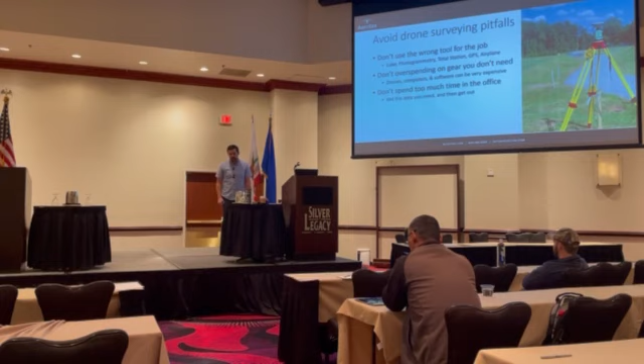But don't overspend on gear you don't need. That's going to be pretty darn important. Don't spend too much time in the office. I mentioned that earlier, that's another big pitfall where people spend huge amounts of time processing the data. What I say here is get the data you need and then get out. We're going to cover that a lot as well, of making sure before the whole project even starts, know what data you're trying to get out of it.

If you're just trying to get topo, then it makes no sense to try and classify power lines and get your photogrammetric model to model the tops of power poles correctly. That's a waste of time. You should focus on topo, get just topo, and get the heck out. Likewise, if you're just doing a 2D ALTA, who cares about topo? Don't worry about that later. Get your 2D planimetrics, and that's it. And then get out of there. That's going to save you a huge amount of time.

And lastly, don't treat this like a research project. A good drone program is boring, repeatable, and efficient. And that's one of the weirdest parts about this, that I come up here, admittedly, as a technology enthusiast, someone that has been working in drones for as long as drones have really been around on the consumer stage, someone that has been working, building, buying my own computers and things like that. And my goal is to make this as boring as possible.

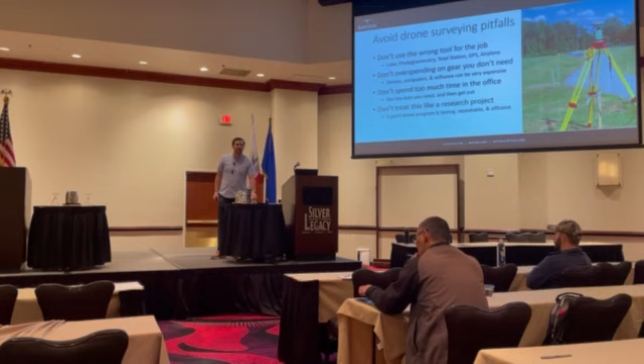I take this really cool technology that a lot of people, you can go to kids in school and say, hey, you want a career in flying robots with lasers strapped to them? Yeah, get the kids excited in a school program. And that's fun. But then I talk to surveyors and I'm like, no, you want the shine to wear off of this program so quickly. You want your drone to be dusty, dirty, and just work. And your field crews pick it up in the morning, go to a job site, put in a battery, push go, and it's just part of the job. It's just boring and uneventful.

And that to me is the real success of a drone program. It's when you can take all of this and just make it boring. It shouldn't require a lot of these crazy PhD level analyses. I've done a lot of those. They're hugely time consuming. And again, like those other programs, they just don't last. So to actually make it boring, what we found with most surveyors, with most companies in general, is there's kind of a journey that a lot of people go through as they learn drones.

And this is something that I really probably should update, as drones are becoming a lot more mature as a technology too, which is really, really cool that we've been figuring out what drones are good at. We've been figuring out what drones aren't good at. What are the good workflows? What are the challenging workflows? And people are now starting at kind of different points along that, because you can start and buy a $40,000 drone with some reasonable level of confidence that it can actually get you good data. Doesn't mean your workflow will get you good data out of that, but you can start with that.

The way that it used to work, though, is everyone would start with just buying a drone for basic photos and videos. Hey, it's a cheap one. I don't want to invest too much. Maybe spend a couple $100 or $1,000 or something on a photo drone or a video drone. Those are actually still great for photos and videos. Most drones in the world are actually designed for taking photos and TikTok videos and that sort of thing. Then they'll start throwing it in the software, whether it's Pix4D or DroneDeploy, something like that, start making orthophotos out of them and say, wow, that's cool.

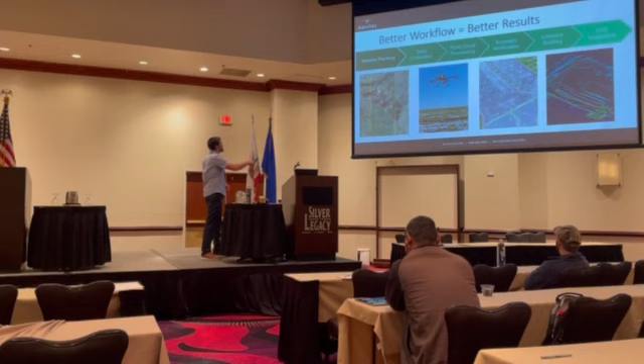And here's the high-level workflow that we're going to be going through today. This has really been refined and enhanced over the years. It's always been a fairly similar workflow for us, but we've added a few steps, taken away a few others, merged them because we've learned more and the technology has changed. But the beginning has always stayed the same for us. The beginning of any drone workflow, and this is the workflow once you've actually bought the drone. I'll cover the drone hardware in a little bit, and all of that setup for the program itself. But the actual workflow for gathering and processing the data always starts in the same place, which is mission planning.

Mission planning is super boring, really quick, but very easy to forget. Think of this as like your packing checklist, right? Whenever you go on a trip, you have a packing checklist and just make sure, okay, yep, I've got socks, underwear, pants, shirts, toiletry kit, whatever. It's pretty boring, but it's pretty important, because if you go on a trip and you don't have any of those things, you're going to be in trouble. Not the end of the world, but it's a real pain in the butt if you travel somewhere and don't have any socks.

Same thing with the drone. You should have your mission checklist. Just say, okay, make sure my batteries are in the case and charged. I plan my mission. I check the weather, and okay, we're good to go. That's all it is. It's a really boring thing, and we'll cover it a lot, but that's one of the biggest time savers when it comes to workflows: taking that 2 minutes the day before, or maybe even a couple days before, just to say, all right, where am I flying? Where are the targets going to be, and how are we going to do this?

Now, I say just a couple of minutes because mission planning is another one of those things that is really easy to overkill as well. People want to take a mission and say, all right, we need everything set up perfectly. Here's our 2-week process for planning the mission, for who's going to set the ground control. It's going to be set 2 weeks in advance. It's going to be marked with these permanent targets, and we're going to fly at this altitude on this day and this time. And honestly, it doesn't need to be that intense. That also can be a time killer.

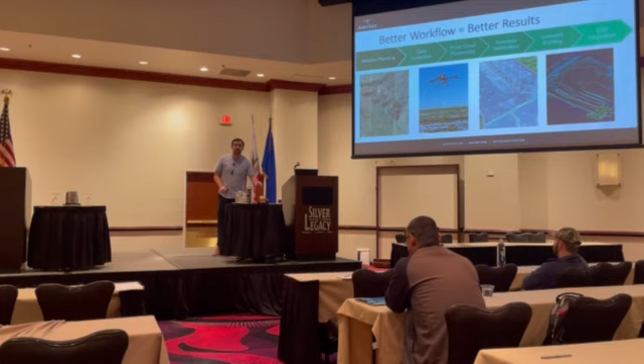And merging it with photogrammetry, creating all of these point clouds, creating those rich, high-resolution 3D models, is more than just photogrammetry processing nowadays. And then in here, after you create all of your point clouds, is accuracy verification. That's a really, really important step, and we think that location is a really important place in the workflow to actually do it. That's another what should be a very quick step that is often overlooked and will sink huge amounts of time if you don't do it until later.

We'll talk exactly what I mean about accuracy verification, but that's basically just saying, make sure that the point clouds that you created, the surface you created, lines up with all of your other data, right? That your topo shots are accurate, that your break lines and planimetrics, your 2D geolocation, is where it's all supposed to be.

Because if you start doing a whole bunch of drafting work and getting it all into CAD before you do your accuracy verification, sometimes we've seen people spend 8, 12, 16 hours on a project drafting it, getting all of this data extracted, only to find out later that it was inaccurate, that they had done some of the photogrammetry modeling wrong, or the LiDAR processing wrong, and they have to throw a lot of it out or find creative ways to shift it accordingly. So accuracy verification is kind of like mission planning. It's a really small, fast step when you do it right, but it's really important to save you a bunch of time down the line.

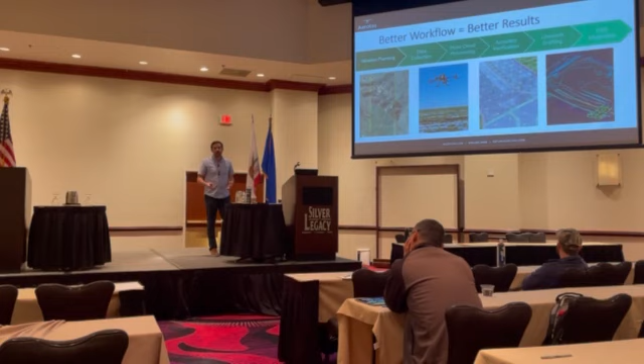Line work drafting is taking those rich 3D models and actually creating planimetrics, creating a more lightweight surface. It's often called vectorization, basically reducing those rich 3D models into something smaller, easier to use, that can be used in CAD. And then getting all of that data into CAD, creating your TIN surface, adding your break lines, adding your symbols, and making sure that all of your layers are correct.

That's the last step. Because when you put everything together, what you are looking for is just a survey. Or more specifically, what your clients are looking for is a survey. Very few people say, I would like a drone survey, at least from the client's perspective. What they often say is, I want a survey. What we hear from engineers a lot of times is that they want a drone survey because they want the live up-to-date imagery.

They don't actually care what technology was used to create the contours or the planimetrics or to take the shots, because they want to get a survey. And a final survey, whether it was done conventionally or with a drone, should look exactly the same, and the drone one might look a little better.

Yes, questions. Thank you.

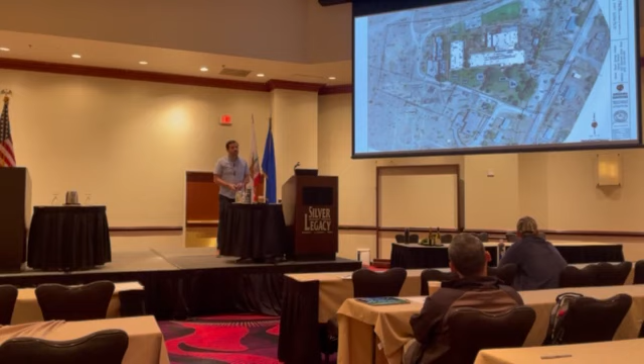Yeah, it's a great question. And yes, drone processing does alleviate that considerably. It's not perfect, and I'll tell you exactly why. So, first, the way that it alleviates it. Traditional aerial photogrammetry was done with very highly calibrated cameras, but typically with much lower overlap. The amount of overlap from one photo to the next was, by modern digital standards, very, very low. But they could get away with it because they were such highly calibrated cameras.

You match a point in two photos with a perfectly calibrated camera, you can be almost perfectly confident that that point is exactly where you want it to be. With drones, the cameras aren't that high quality, which is trade-offs. On the one hand, we wish we had quality cameras, but quality cameras and calibrating cameras is ridiculously expensive. So the way that digital photogrammetry makes up for that is with, by traditional standards, really high overlap.

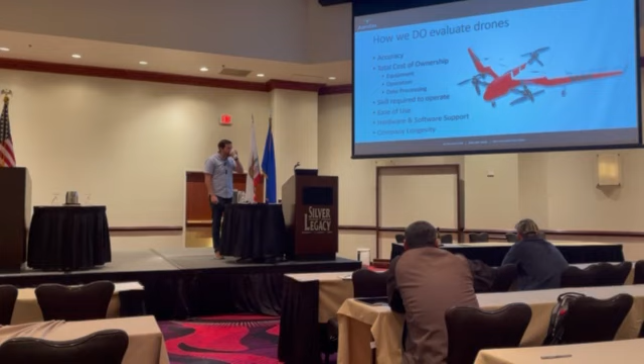So just a couple words of caution when buying drones. Always beware salespeople. There are honest salespeople out there. There are nice, good ones out there, but they're incentivized to often sell you a more expensive drone. I'm a little bit the opposite. You get to hear my perspective today, which is I'm incentivized for you to have a cheaper drone that works a little bit better.

Do not buy on tech specs alone. That's probably the most important. If I can urge you anything, please, please, please don't buy on tech specs alone. Tech specs are wonderful. Good tech specs often do lead to a good drone, but really it is the entire workflow that matters.

Lastly, just talking a little bit about some drones out there. Again, if you really want all of the detail on the different drones in the drone ecosystem, different companies that are out there, generally speaking, there are two categories: DJI, and everyone else. DJI is the most common manufacturer. We definitely see most drones that are flown for survey are still DJI.

Simple workflow, relatively cheap, easy to use, and very good, but typically, if we're being honest, not the best possible accuracy. With the downsides being that they're Chinese made, poor hardware support, and they're not going to be the most cutting edge technology. If you buy on the tech specs, like I've said before, DJI will lose out, so to speak, because other people will put more powerful LiDAR sensors, cameras with more megapixels on their drones.

And the everyone else categories are more specialized. They're often, not always, made or in some ways assembled in the USA, better hardware support and more cutting edge technology, but they really have a much more complex field workflow. They're much more expensive and they require specialized training. And I'd caution you to not underestimate how important these complex field workflows are.

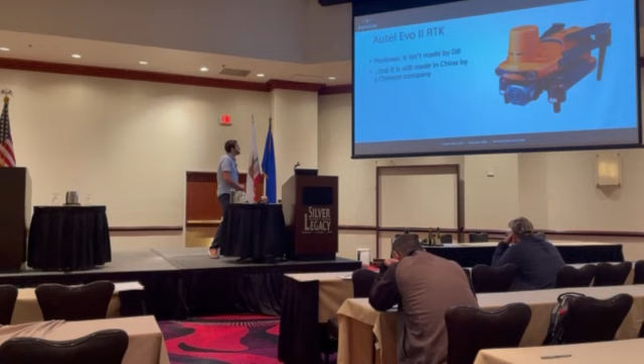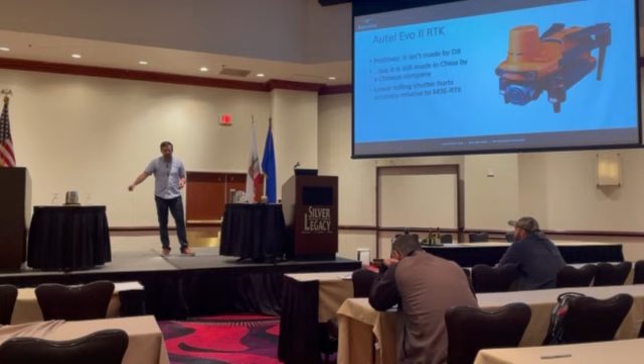I do want to talk about the Autel Evo 2 RTK specifically. That's a very common one because its main benefit is that it isn't made by DJI. That's the number one reason why people recommend the Autel Evo 2 RTK. Like I said, Autel is still a Chinese company. It's still made in Guangzhou or Shenzhen, I'm not entirely sure, one of those places. Still made in China by a Chinese company. And it has a linear rolling shutter and a smaller image sensor that hurts it relative to the Mavic 3 RTK. So if I had to say between the two drones, the Autel Evo 2 RTK and the Mavic 3 Enterprise, the Mavic is just a little bit better in pretty much every way.

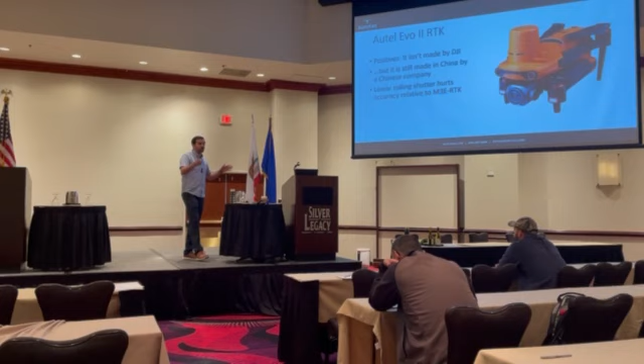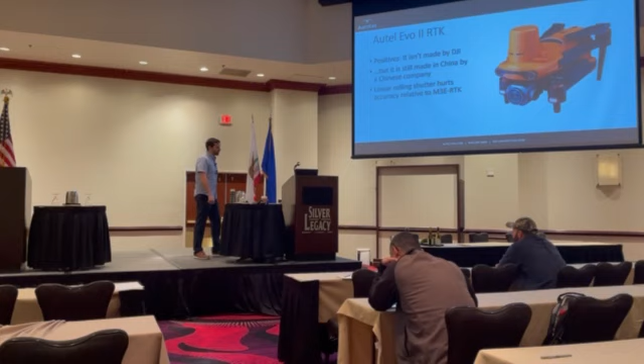The Autel Evo 2 is a perfectly capable survey grade drone. It's completely usable and it can get good data, but it's just not quite as good. It's not everything that everyone cracks it up to be. It's not made in America. It's not going to replace the Mavic 3. It's just not quite as easy to use in our opinion. It still works. If you use one of those, it's perfectly competent and absolutely can be used. But if you're deciding between them, we still think the DJI is going to be a much better value overall, a lot easier to use, and a little bit better data quality.

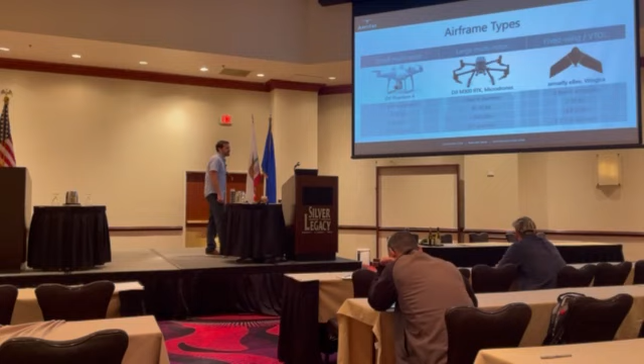Just kind of getting through all of this: airframe types. Small all-in-one multi-rotors like the Phantom, like the Mavic series. These are overwhelmingly the most common drones out there for surveying. And again, that goes back to the workflow side of things, because they're just straight up easy to use. They're easy to transport, which is a very underappreciated aspect of drones. It's not something that your field crews are going to look at and say, well, that's a pain in the ass, I don't want to load that in the truck.

The M300 and a lot of these bigger ones, field crews look at that and say, I don't want to use that thing, it's a pain in the butt. They will use it, but they're much more excited about things like Phantoms and Mavics because they're so much easier to fly, so much easier to set up and unload, so much less intrusive in the sky. Those are great. And then fixed wings and VTOLs, vertical takeoff and landing drones, have very much fallen out of favor lately, because they used to be common when drone battery life, drone longevity, wasn't as good.

Now that multi-rotors have really improved their aerodynamics a lot over the last 5 or 6 years, they've improved their battery, the manufacturing quality, how lightweight they are. People have realized that small multi-rotors are just as capable of multi-hundred-acre sites as fixed-wing drones are nowadays. Sure, a fixed-wing can fly a, call it a 1,000-acre site in like 2 flight batteries or something, and the small multi-rotor might take 5 or 6.

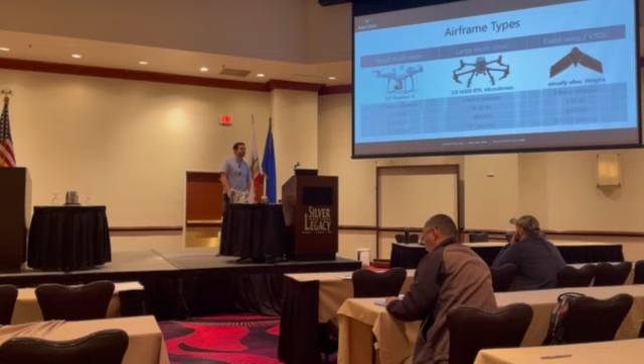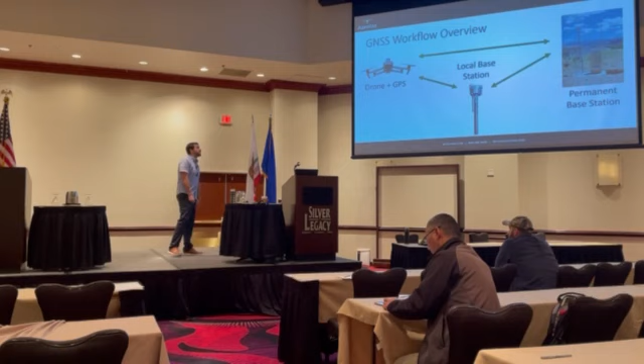Talking a little bit more about GPS workflow options as well. This was another talk that I gave, very in-depth about GNSS processing workflows, how you actually connect an RTK drone to a base station. Typically modern day drones, and in fact, by our recommendation, every survey drone that you buy today should be RTK enabled. There are older drones that are non-RTK enabled, like your old Phantom 4 V2 series or some of the Mavic series. If you have one of those and you're successful with it, great, keep using it. You don't necessarily need to upgrade. But if you're looking to buy a new survey drone, we think it absolutely ought to be RTK enabled. But the workflow does matter.

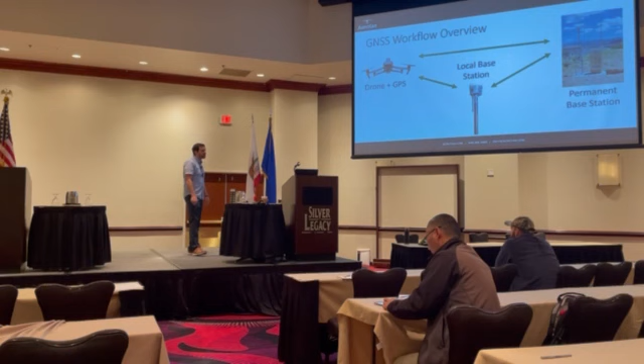How you connect the drone and its GPS signal to a local base station and then to a permanent base station for corrections and that sort of thing. With all of the different options for GPS workflows, there are more permutations than just on here. The simplest is no RTK, where all of your accuracy, all of your precision is coming from ground control points. Very simple field workflow, very easy to use. Other options are doing everything in post-processing kinematic on the drone. Pretty high accuracy. You don't need as many GCPs, but it's a pain in the butt.

Using RTK, real-time kinematic, with some sort of local base station, that's actually going to be our favorite workflow overall. That gets you very, very high precision. You still need GCPs in our recommendation, which I cover a little bit. And then the last one, RTK over NTRIP, which is the network protocol for streaming a lot of this GPS data. That works, but we don't love it. It's not going to be as accurate as actually having a local base station. The local base station really does make a difference in terms of overall accuracy.

Another thing on the hardware side is LiDAR and photogrammetry. I cover this in two places. One is when you're buying hardware, do you need LiDAR or photogrammetry? And the other is, assuming you have a LiDAR drone, should you actually use it on a job site? The questions you ask are going to be kind of the same: what does the job site look like, and how much vegetation is there that you need to cover? This is where we were talking a lot. Again, thank you for those questions about the pulses of what LiDAR can do. LiDAR's main benefit, the reason why you would buy LiDAR, is if you do a lot of work in vegetated areas where you need ground cover, right?

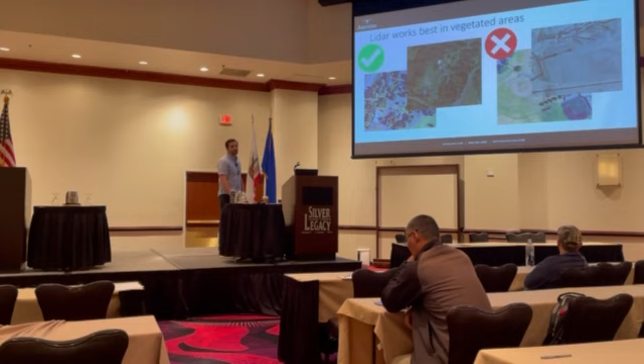Or of course, whether it's aggregates, earthworks, new construction subdivisions where there isn't a plant anywhere in sight, you definitely do not want LiDAR. At that point, it's just a pain in the butt and you're not getting any benefit from it whatsoever. The reasons to not use LiDAR, and again, this is what I was saying at the beginning about avoiding those pitfalls: the hardware is expensive. They are bulky and hard to fly. And I really need to find a way to stress better how much of a pain bulkiness actually is to real world field operations.

It's these little things that make the difference between a drone getting used a ton and a drone not getting used. The newest Mavic 3 Enterprise comes in a lunchbox size case. It's incredibly easy to throw in the truck and carry anywhere, whereas the M300 with any of these LiDAR systems, really any drone LiDAR system, is multiple huge cases that often require two people to load into a truck, a briefcase full of batteries that might weigh 50 or 60 pounds just for the batteries. All of your additional sensors are in their own case. Just the LiDAR sensor on an M300 is about the same size as the entire drone surveying setup for a Mavic 3 Enterprise.

That level of ease of use when it comes to these boring, repetitive workflows that I really like to see, I can't stress enough how important that is. And that's why we see so much more data from photogrammetry drones than from LiDAR drones, because honestly, a lot of the successful companies have learned you just bring the drone with you and you fly pretty much every site. Anytime you go, just fly it.

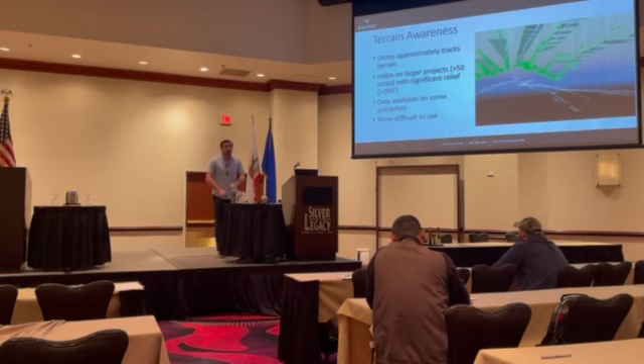A lot of things. Anything from rolling hills where you have 100-foot hills to cliffs where you're working on a coastal cliff where you might have a 100-foot cliff or a bluff of some form. Likewise, even if you have a project that's just a slow grade up the side of a mountain, or up the side of a road that's just going uphill and you're doing a mile-long road, and a mile that way is 200 feet higher than where you are right now, you should have a drone that slightly follows that terrain up and then slightly follows it down on the way back.

There are all kinds of different things, like quarries, right? Actually, quarries are a little bit trickier, I should point out, because the base terrain that you use for terrain awareness might be old, and quarries change their terrain by very significant amounts very frequently. So if you actually are doing any sort of terrain-aware flight on an active quarry, you've got to be extra careful about what the base surface model that's used in terrain awareness is.

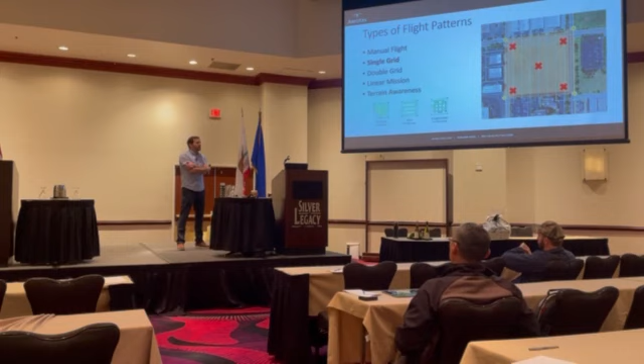This is a little interesting because there are multiple types of flight patterns out there, and we generally, for most applications, recommend a single grid flight pattern, or what is known as a Boustrophedonic flight pattern, also often known as lawnmower style, where it just goes up, down, back, forth, back, forth. There are some drone autopilot apps out there that call these 2D mission maps. In fact, one of the screenshots here says grid for 2D maps, which is really misleading. This sort of Boustrophedonic flight pattern is completely acceptable for 3 dimensions, and the data very much proves it out.

Because the alternative, what a lot of apps push, is a double grid flight pattern, where one grid goes north to south, the other rotated 90 degrees east to west. This captures about twice as much data, if you aren't changing any other overlap settings, which winds up making your processing time take about 4 times as long, because processing time is nonlinear. And for the overwhelming majority of missions, it provides no statistically measurable benefit.

Now, there are a couple of outliers there, like with LiDAR projects, where having different angles can actually improve some vegetation penetration. But for the overwhelming majority of photogrammetry missions, single grid is going to be half as much data, half as much time, and exactly the same level of accuracy. We've done lots of tests proving that out.

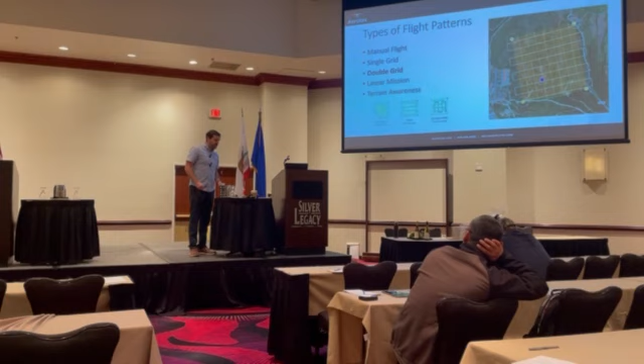That said, some people still insist on capturing double grid data. They think it's more accurate, it's more reliable. And if you want to take that extra time processing, then be my guest. But I'm just here to let people know that the data does not prove out that this actually gets better data for photogrammetric mapping.

A couple of caveats on that. If you are actually doing 3D modeling for, say, making a map of a video game, where you need the facades of buildings to be much crisper and have better resolution, then yes, a double grid flight pattern for photogrammetry will get you better imagery data on the facades of buildings where you have windows and doors and things like that.

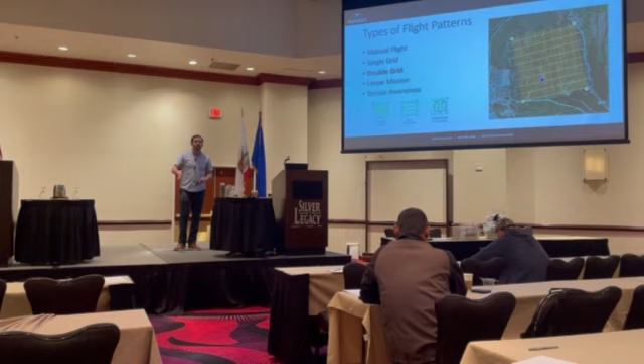For surveying applications, however, you usually don't care about how pretty the windows on the side of a building look in a 3D model. What you care about is the height of the building, the footprint, the topo, the paint striping, things like that. And for those circumstances, there is no benefit for the double grid, or very negligible benefit. So those are just the 2 most common flight patterns.

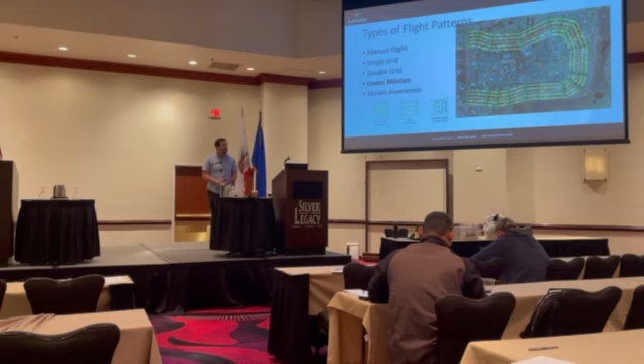There are also a few other ones, like linear missions. Linear mission planning is great, where the drone flies back and forth a few times over a road. A couple of things on the data side from there. Number 1 is we would recommend a minimum of 3 parallel flight lines, not 1 or 2. Yes, mathematically and based on the rules of physics you can get away with 1 or 2 flight lines. From a workflow reliability standpoint, we strongly recommend a minimum of 3 flight lines on any linear mission plan in order to get enough overlap to properly calibrate the camera and account for any other errors or a missed photo. Three flight lines is definitely what we would recommend there.

And then the last type is terrain awareness, which we already talked about, where you import a DSM. This is just an example of a kind of crazy linear mission plan that goes back and forth. And this is what the terrain surface based on that underlying elevation model would look like. Terrain awareness works great for both linear mission plans as well as for larger sites where you have more than 50 or 100 feet of elevation change over a project site.

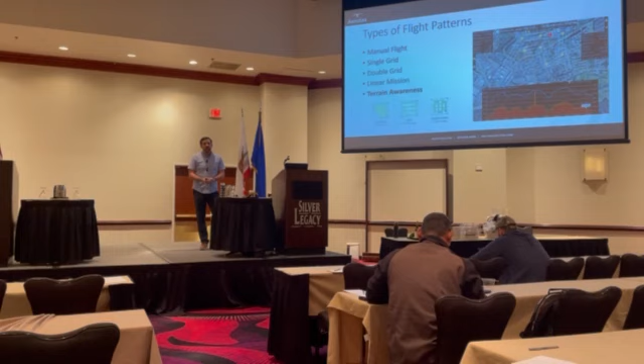But when it comes to mission planning and actually picking your altitude, the most important thing to note is that in the real world, there absolutely is such a thing as too much data. I don't love the type of people that say, oh, more data is always better because you can filter it out. Yes, you can filter out certain data. You can process with less data. You can use more computer processing time.

But that's a telltale sign to me that someone's looking at this from a research project standpoint. They're not trying to turn it into that boring, repeatable business workflow. To get that boring workflow, you don't want too much data. You want only the data that you need, because anything else just takes up time and money and processing costs and labor costs and all of that stuff.

And the recommendations to me to make this that boring, repeatable, profitable, useful workflow is, well, don't fly lower than you need. If you are doing 1-foot contours on undeveloped land, you really should be flying at 400 feet, basically all the time. If you are doing an as-built survey of a gas station or something, then yeah, totally fly at 100 feet or 150 feet, fly lower, get all of those details. You won't drown yourself in that level of detail on a site that's only a couple of acres. But if you are doing just straight topo, fly higher. That's actually a good thing.

Another thing that I haven't actually mentioned here is from flying too low, a lot of drones can often suffer from what I like to call the drinking straw effect, or trying to survey through a drinking straw. When you get so close to the ground with these drones, anything lower than 100 feet, the actual footprint that the drone can see on the ground is so small that it makes it much more challenging to do any sort of 3D mapping on it, because it's only seeing a tiny footprint of the actual ground.

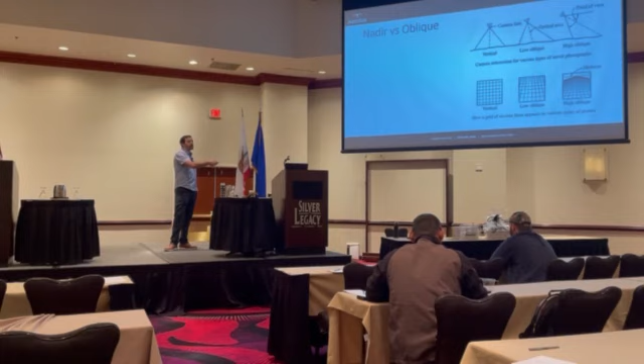So by tilting your camera up, by flying at obliques, people say, oh, I can see it from angles. That'll help me maybe see under trees a little bit better. That'll help me get my vertical accuracy a little bit better. The actual data and statistics doesn't really bear that out in most circumstances, at least not with the drones that do have over 80-degree field of view or something like that. What you actually are doing, you wind up getting less resolution. So more overall data with more photos and lower final resolution because it's further away from the drone.

This is going to be another one that's kind of close to that. You can see how big the squares are here, and just further away, they're just a little bit smaller. And that actually does, on a statistical measure from a whole project site, make an overall impact. So for us, we do generally recommend nadir imagery. We have not found any meaningful impact for surveyors from adding in oblique imagery. Again, there are going to be edge cases where that is not the case.

If you are doing the modeling on the facades of buildings, if you have a near completely sheer cliff wall and you need to get the face of the cliff wall, then yes, adding in oblique imagery can actually help with that. We are trying to get details on the vertical features themselves. Oblique imagery can help. But that is the exception, not the rule in survey. In survey, for most things, nadir is going to be better. And oblique imagery, like I said, is going to lower resolution, but it's going to increase your processing time. And the resulting accuracy is rarely improved by adding obliques.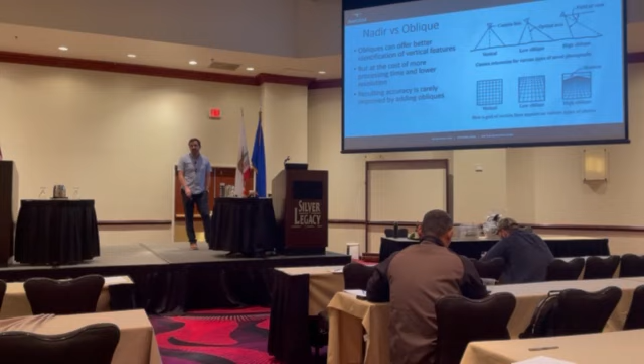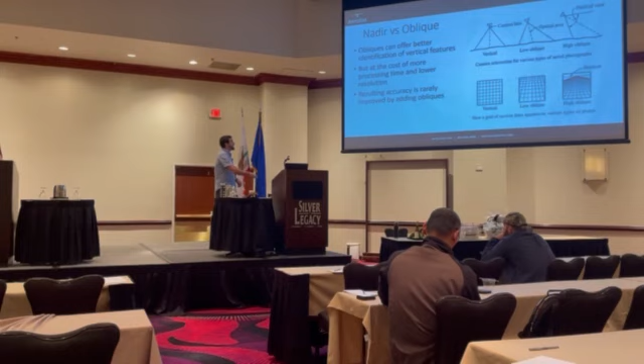This is, again, one where we've actually done a number of studies, a number of white papers: take the exact same site, fly it once with just single flight pattern, 75-75 overlap, and then fly it again with double grid pattern, and then again with oblique imagery and multiple things. And what you see is there is no statistically significant difference at all in the accuracy of flying these sorts of obliques or overlaps on the majority of missions. Statistically, it is completely insignificant. It does not change it.

So just kind of a summary of some of those mission planning best practices. Single lawnmower flight path is our recommendation for most projects. 75-75 overlap for photogrammetry, or 60-65% for LiDAR, and nadir only with no obliques.

Last thing I'm going to talk about is planning ground control points. And the first thing to talk about when planning ground control points, where to set them and how many to set, the real factor that makes a huge difference in mission planning is what type of RTK or PPK GNSS correction system you are using. Whether you're using a local base station, which we talked about earlier, that is very much our recommended solution, whether you're using a network correction service, or no ground control points at all.

Generally speaking, if you use no RTK or PPK, rule of thumb, you need 5 control points for every flight battery you use. They need to be pretty well evenly distributed, set around the corners, around the center of the site, something like that.

Whereas if you have RTK or PPK, really any of these ones at all, you need a lot fewer ground control points, and they are much less sensitive to their position. For example, with a site, if you can only access one side of the site because that's where the road is and the rest is very steep and off the cliffs, it's nice to have them on higher points and lower points to help with calibration, but it's not strictly speaking necessary because a lot of the precision within that drone flight is going to be coming from the actual onboard RTK nowadays.

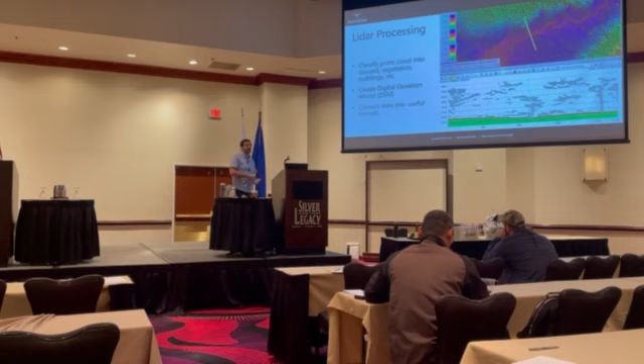LiDAR processing is also part of that point cloud processing step, that 3D modeling step. It's when you classify everything, or you create your LAS point cloud, you geo-reference it, creating a digital elevation model out of it, and converting a point cloud into useful formats. We don't consider point clouds to be a final deliverable. Many people do. But our personal belief is that the point cloud is only an intermediate step to actually getting to a surface, and that typically a surface or a CAD file is what your actual final deliverable ought to be.

And then once you actually have those rich models, you go through line work drafting to reduce it into a CAD-friendly surface to actually get your proper layers, your points, your polylines, that sort of thing. And then you finish it in CAD where you merge in your field shots, you merge in things like boundary.

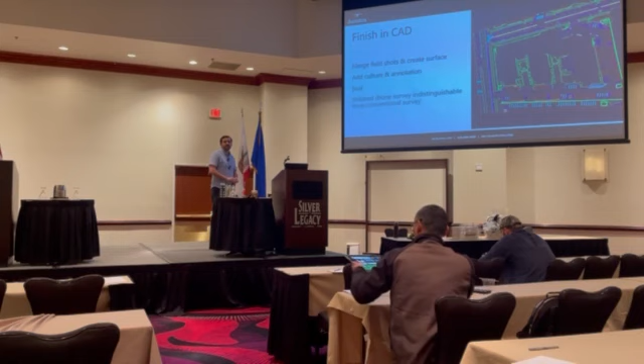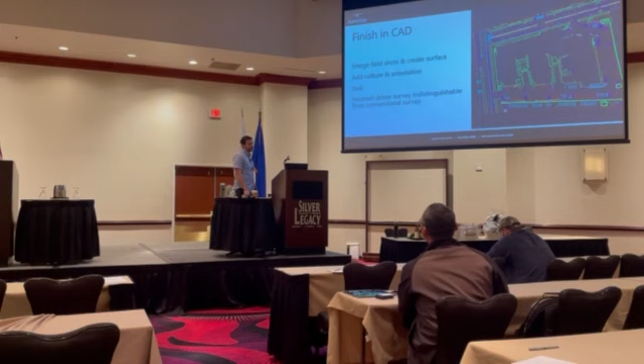You know, that's something that I never talk about much is boundary because, quite frankly, drones don't do boundary. You can't do boundary. That is both legally very protected, but also something where drones can't see legal lines at all. But finishing it in CAD matters because oftentimes you are doing a lot of the topo from the air, and then you do the boundary on the ground. You have to merge it all together. That all goes together.

So just to kind of summarize what a lot of this looks like all together. You start with photos, ground control, RTK, PPK data. This is kind of the raw outputs from your data collection stage. It goes through this photogrammetry and LiDAR processing step, which will create a couple of different deliverables, usually a point cloud, a digital surface model, and an ortho photo. Then it goes through what we call the line work drafting stage. That's where you have your drafters actually vectorizing and extracting this data in 3D points, polylines, typically going to be in a DXF format.

Then it goes into the final CAD stage, CAD finishing, final quality assurance, which is where you merge everything together, create your surface, contours, site culture, usually in an AutoCAD style DWG format, depending on what software you use. And that's what gets you your final deliverable. This workflow is pretty important.

And the other thing that we've found is really important with this is actually making each step fairly discrete, that you don't get to go into line work drafting until you are done with photogrammetry processing. A lot of people run it through photogrammetry and start doing line work drafting, and then they'll find an error and they'll have to go back and do more photogrammetry. And that's a real quick way to just spend a whole lot of time. These steps, we like having them pretty discrete. Yeah.

Great question. I'll cover that in just a second. The answer is a lot of different ones. But using things like Global Mapper or Virtual Surveyor, we use QGIS for some of this stuff as well. Oh my gosh, I'm drawing a blank. Terrascan is going to be one of the ones that we use heavily for LiDAR as well. Mm-hmm.

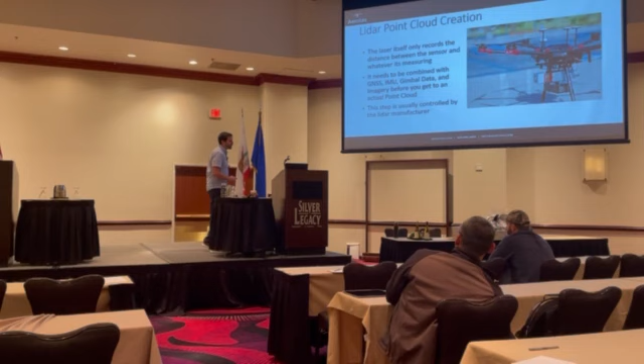If it's a 20-minute technical YouTube video for just how to create an LAS file, that's a big red flag for someone like me. Creating the LAS file should not be taking you 20 minutes of tutorials to know how. It should be much simpler than that. But yeah, in the background, all of these are doing the same thing. They are combining the GPS data, the base station data, the IMU data, the imagery data to actually create that single point cloud.

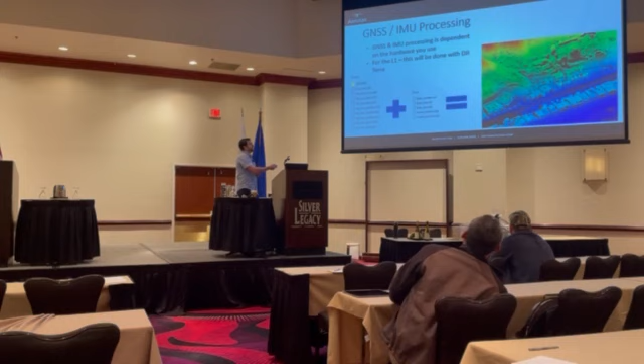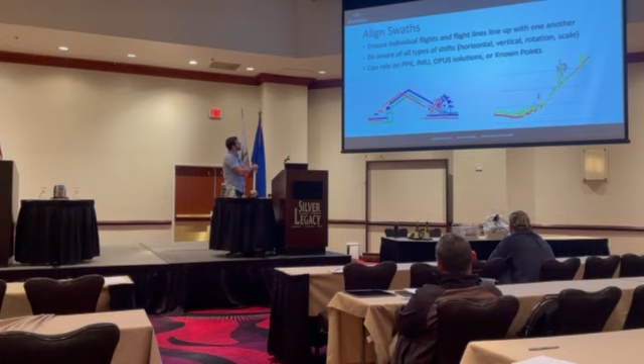Once you're there, depending on which LiDAR system you use and how you georeference it, you may also need to do a swath-to-swath alignment. This is based on a number of different factors, what type of GPS post-processing you do, because sometimes raw LiDAR clouds can look like this, where this is an exaggerated version, of course, but where a house on different flights might be slightly offset and you want to combine them together, that's pretty easy to do.

Now, there are a couple of ways to do that. You can colorize the point cloud based on intensity. That's one of the background ways that you can actually still see the ground targets. You can use a colorized LiDAR point cloud for 2D geolocation or for X and Y georeferencing. That is often not great because the colorization of a point cloud is applied typically after the fact. So the colorization on a point cloud is not nearly as accurate in 2D as most people want it to be. Or you can do a lot of this with GPS post-processing.

So there are a number of ways to do it, but either way, we really like using ground control points in general. And I mentioned this in the GPS workflow yesterday.

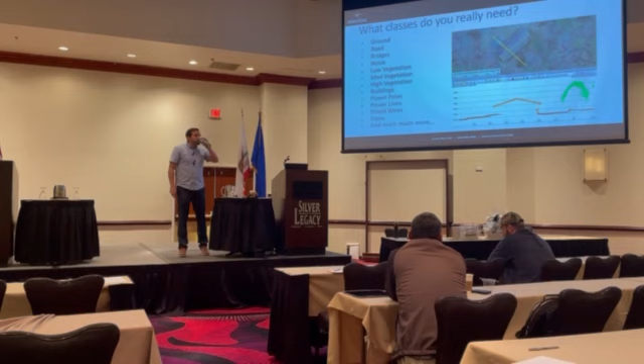Great question. LiDAR, 100% LiDAR. For power line mapping, LiDAR is really the only option. Photogrammetry is not capable of reliably collecting power line data. Exactly. Photogrammetry requires 3D matches, and power lines are 2D lines. So I don't want to say impossible, but it's effectively impossible to do photogrammetry to create power lines. You need LiDAR.

Actually, yeah, that's a good point. I really should add it to the slides. It's vegetation or power line. And power line mapping is its own kind of niche thing. For example, if you are doing that, your guys probably use PLS-CADD or some sort of similar power line survey program. And that's where you absolutely do need this sort of classification, because the rules are different as far as how far... I'm going to say something stupid because I don't know power lines that well.

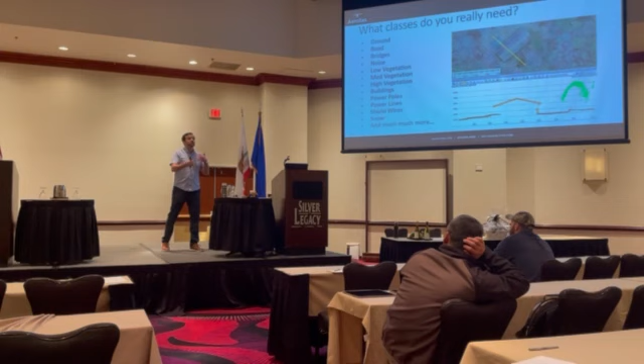A 240 volt line or something, how many feet that can be away from a building, how many feet that can be away from vegetation, and how many feet that can be away from another object or from a road very, very much matters. And that's where this level of classification matters. In fact, this was a survey that we did for a power line company that really, really mattered. And the distances from this line to that line really matter as well. So when you are doing that, it does have to be LiDAR, and you do really care about classifications.

So how do you actually classify it then? Well, what software do you use? With photogrammetry, Pix4D is the market leader. Point cloud classification, there is no real market leader on this. A lot of people say, what's the best software for point cloud classification? And what we've found is, we have licenses to most of these things. There is no magic bullet. Some are better than others. They all kind of have trade-offs.

Some have all of these different great tools, but they have a kind of clunky user interface. Some have a really smooth user interface, but maybe they don't have as many tools for doing path profile views and extracting lines and surfaces in different ways. Some are really good at their automatic ground classification algorithms, and others are better at their power line classification algorithms and that sort of thing.

But generally speaking, our recommendation is just to use what you're most comfortable with. If you are entirely in the Leica system and you already use Leica Cyclone, then yeah, it's going to be good enough. It's not perfect. I don't particularly like it, but we have some LiDAR techs that absolutely swear by it.

Global Mapper is kind of a GIS-based one. It really is a jack of all trades that can do a lot of things, but it's not going to be the fastest when it comes to very large point clouds. It can struggle with that sort of data. It's not the most advanced one out there, but it can handle all kinds of different data formats. These are some of the most popular ones out there, but really they're not all that great. Trimble Business Center is probably the weirdest one. That software tries to do absolutely everything, but some people swear by it.

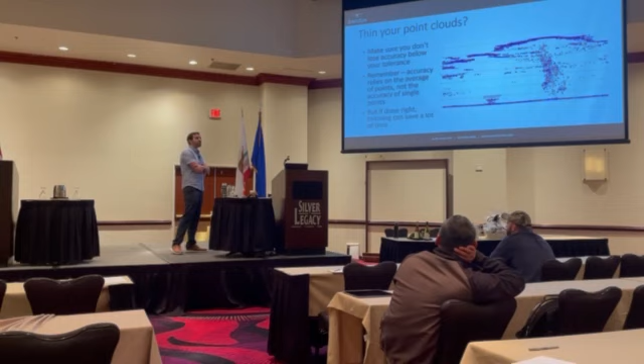It has higher highs and lower lows because of the way that the intelligent 3D thinning model actually introduced a bias into the data. So thinning point clouds to make the data easier to process is viable, but you have to be very, very careful that you are not introducing new statistical biases into your data.

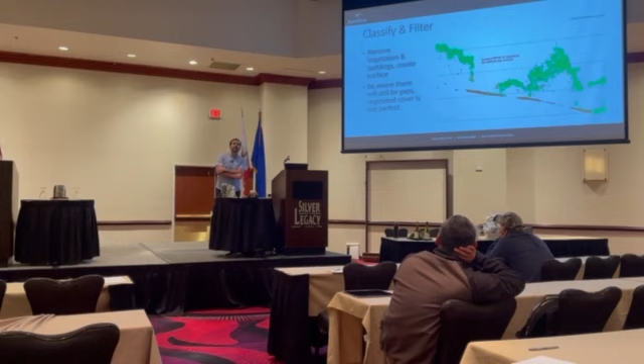From there, like we've talked about, you kind of classify and filter it, remove your vegetation. Also, another thing to be aware of is just acknowledging the fact that LiDAR penetration is not perfect, like we talked about before. There are gaps in here. Depending on what ground classification methodology you use, different softwares all have their own ways of setting how wide of a gap, how wide of a hole you can have without ground data.

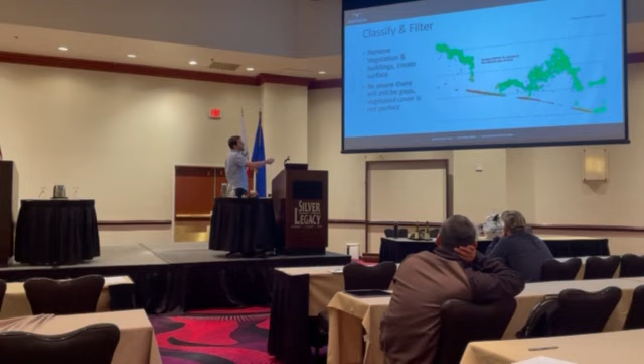Sometimes they'll see this gap and assume, oh, there's something there. So it calls the lowest points on this bush ground. And then your ground surface has a big spike here, which is something that's very common in ground classification algorithms.

So making sure that you have a human being to QA a lot of this is pretty important, because a human can often look at the imagery and say, oh, there's a big boulder there that actually probably would be a high point in the ground to show it as a rock. Or that's just a dense bush, and you then go interpolate directly underneath it. So just acknowledge imperfections in the data, because again, we work in the real world, and data is totally imperfect.

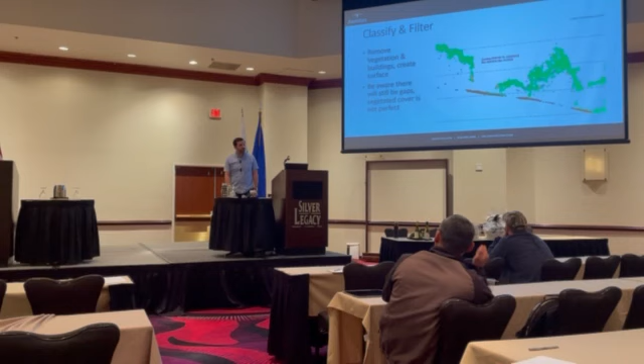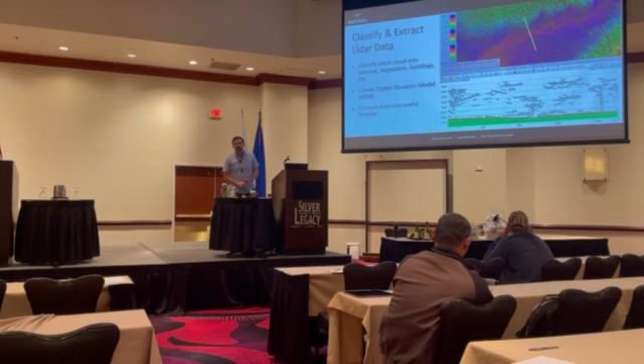So once you classify it, our next step typically in LiDAR is actually to create a digital elevation model as well. I'm pretty sure I have some slides in a bit of exactly how to do it and why we like converting LiDAR ground data at least back into a rasterized DEM. We'll cover that in just a second.

But one last thing on ground classification is, honestly, part of why automatic ground classification programs still have a ways to go is because there's so much human judgment that's required on what even counts as ground. For example, if you see a big debris pile like this, there is an argument to be made that, yeah, that's ground. It's a bunch of chopped up concrete.

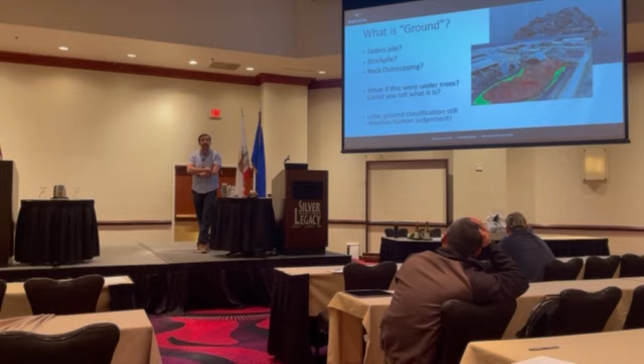That's basically a little concrete hill. Alternatively, there's a way to say, no, that's a stockpile or that's debris. We're going to be clearing it. The actual ground surface would go underneath it. Likewise, with major stockpiles like this, is the actual quote unquote ground surface going to be the top of this stockpile or the bottom of this stockpile? And the stockpile itself is classified and measured differently as a stockpile. There are very good arguments and good use cases for both of those things depending on the actual survey.

And same thing with rocks as well, right? Is that ground by itself, or are those rock outcroppings that are marked separately? There are reasonable arguments to be made for both. And the human judgment is, could you even tell what all of these are if it were underneath trees and you didn't have the images? A great one that I should put a picture of on here that is different between humans and automated things is if you ever see the profile of a car underneath a tree.

If you had a car parked underneath a tree, a human can look at the profile of that in pretty much any way in LiDAR data and say, that is obviously a car that is parked under this tree. I can see that there is a road going under this as well. So that is clearly not ground, and you just ignore it. Whereas an automated machine would say, oh, that looks like a hill to me. It's a lump, it goes up, it's not at crazy steep angles necessarily. It's just a 3 or 4 or 5 foot tall hill, and that's what an automatic ground classification will do.

So we like a lot of these automated ground classification softwares. They are great, but they pretty much all require a certain level of human judgment to clean it up and get that final information as well. From there, like I said, we actually rasterize the point cloud data too after we classify it before we finally get into the final surface. And part of the reason we do this is aerial LiDAR point clouds are, as I said, clouds. They are not perfect individual points.

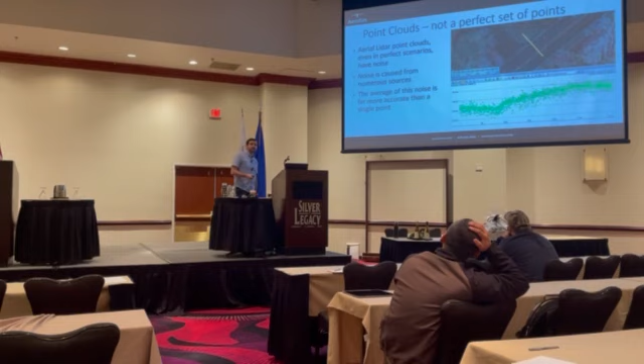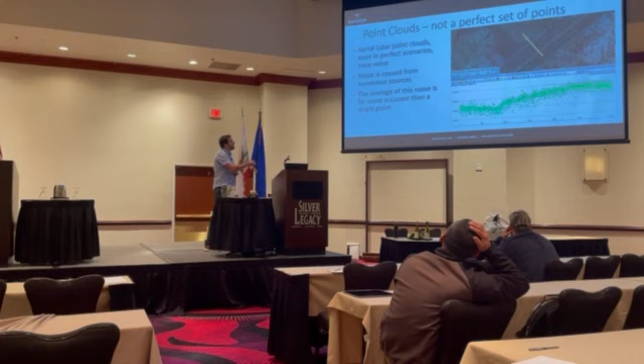This is one of the coolest parts of the workflow to me as the mathematical statistical guy that I am. This is what a profile view of a point cloud looks like. And if you look here, this is the top-down view. You can see this is a profile view of a road. So it starts here, kind of goes down, and then it goes up towards the crown of the road, just so you can see in the profile view. Now that's concrete, or it's asphalt. There's no vegetation. That should be a pretty hard surface.

But what we actually see here is a cloud. There's actually a good amount of noise in that data. This is the reason why a lot of people say, oh, I don't like the L1, or maybe I want these other systems because there's noise in the data. And while each individual point on this point cloud may have half a foot of noise or accuracy on each individual point, the average of these points is statistically proven to be far, far, far more accurate than any point individually.

The human eye again is really able to see this. You'd be able to draw a line that goes down the kind of weighted average of this, and it would be smooth. And the data very much bears the fact that that line, that average of all of these points, is going to be a lot more accurate than trying to take individual points out of the point cloud. And this is where your LiDAR processing workflow really matters. Because if you just extract individual LiDAR points from your LiDAR point cloud in order to create a surface, then you are getting this much error. You might see half a foot of error. But if you are rasterizing your data, you're averaging those points, you're going to get a lot better data.

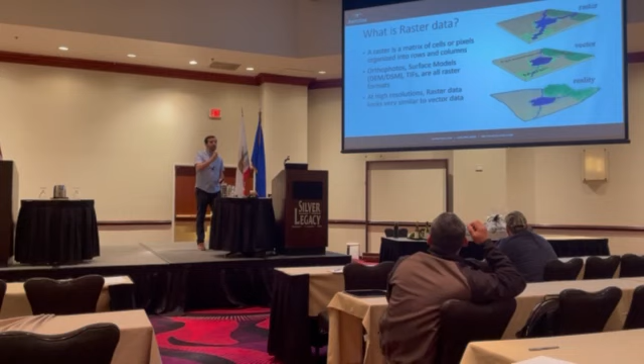So what is raster data? That's basically taking the point cloud, the vector data, and turning it into raster data. Raster data is going to be a grid. A picture, for example, is a raster data set because it is all pixels. It's the number of pixels in the grid, and it is rasterized. A little bit more simplified, this is the difference between vector data, which is going to be exact lines, and this is what it looks like in raster data. Obviously, we're working at much higher resolution, so we're not actually gridding everything to the point where you're losing any meaningful details.

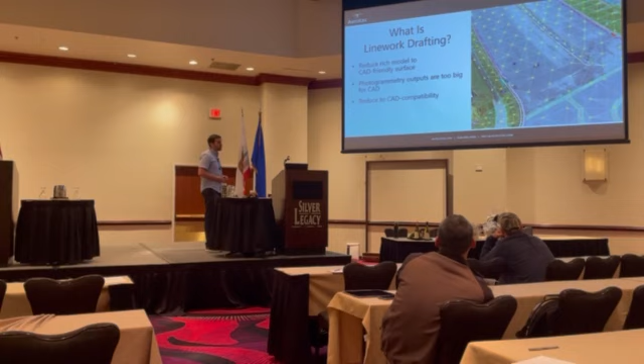And to finish things off, we are going to talk about line work drafting. So line work drafting is when you take these full resolution, rich 3D models, and you actually simplify and reduce them to a CAD-friendly surface. And that's because photogrammetry outputs and LiDAR outputs both are honestly just way too big for CAD. You need to reduce them to CAD compatibility before you can put it in Civil 3D. I promise you, Civil 3D cannot process a billion point cloud. It also can't do a 10 gigabyte or even a 5 gigabyte ortho photo. And even if it could, drafting in Civil 3D is kind of a pain in the butt.

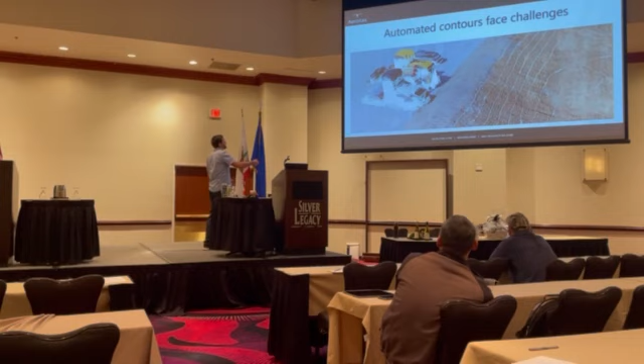So why is line work drafting necessary? A couple of reasons. One, the files are just way too big, too much data that you don't need, right? These full resolution point clouds have a huge amount of data on the trees. Yes, trees matter. Sometimes you need to mark exactly where the trees are, but you don't need to know where every single leaf is. Also, the full resolution data often has things like ugly contours, right? You're going to have contours drawn over buildings, vegetation, or cars, things like that, that you need to figure out.

I think they're going to be pretty close, but I've also heard a lot of times that technology is very close and it's not quite there. But at least for the today answer, maybe this will be different in a year. For the today answer, there are things in here that can automate certain parts and they can help you draft break lines and they can help you find power poles and power lines. But usually it's pretty manual because line work drafting takes a lot of time.

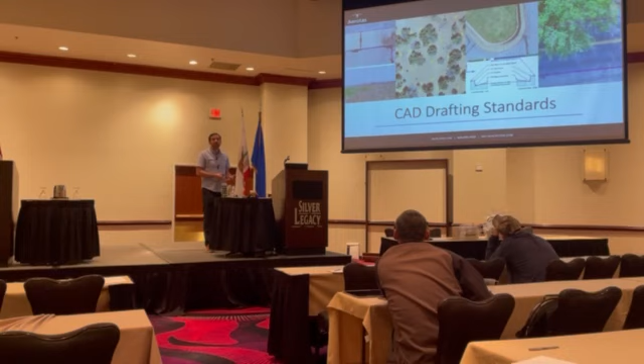And again, the human element still has a major advantage over the automated element when it comes to things like, how do you draw a sidewalk with very significant damage? Do you draw it directly along the sidewalk line, or do you try and trace it along where the damaged parts of the sidewalk are? Computers and machine learning oftentimes do both. It's a hard judgment call, but I can actually tell you the answer for us. We have standards of how many feet there has to be of cracked or damaged sidewalk before we mark it specifically as cracked or damaged. But also just having a straight line with the imagery backing it in a CAD file is typically one of the best ways to do it so that you can actually see it.

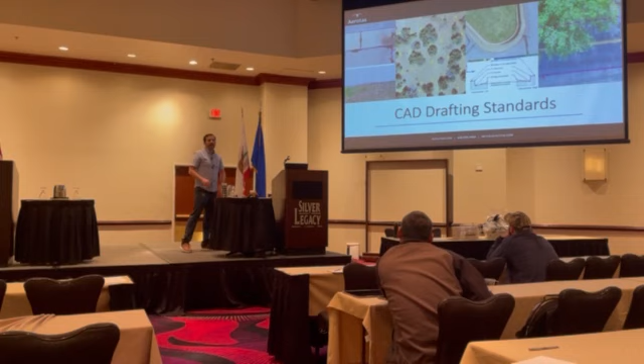Same thing with what is the density of the topo points used to create your TIN surface? How do you balance how big and usable the files are versus how much resolution and granularity we get into it? Drawing curb lines. How many curb lines do you draw? 1, 2, 3, or 4. Back of curb, top of curb, gutter, flow line, edge of pavement, things like that. And also even interpolating under trees. Having clearly defined standards is what makes the drafting workflow a lot faster.